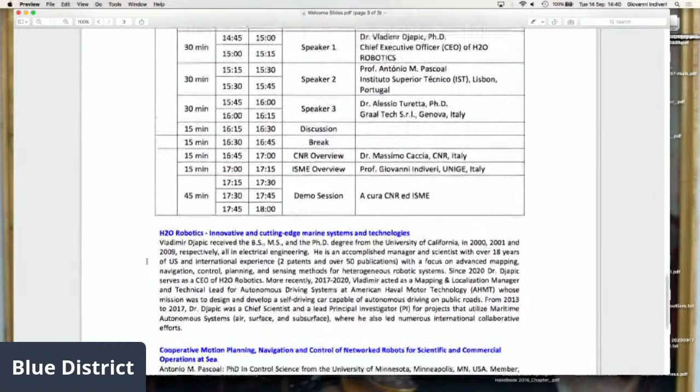So the first talk will be by Vladimir, approximately 30 minutes. This includes some questions at the end of the presentation. And here you see a short introduction of Vladimir himself. So he studied and worked for many years in the US in autonomous marine systems, and also more recently in autonomous driving cars. I will skip all the details that you can probably read on the slide.

I would just like to mention that a few years ago he came back to the old continent, and he is now leading this spin-off company - I think it's a spin-off of the University of Zagreb in Croatia. The title of his talk is Innovative and Cutting-Edge Marine Systems and Technologies.

Then, after his presentation, we will have a talk by Antonio Pascoal on cooperative motion planning, navigation, and control of networked robots for scientific and commercial operations at sea. Antonio's CV is also reported in the slide. He has a very long experience in several institutions, beginning with the IST that I mentioned earlier.

He also has an appointment with the National Institute of Oceanography in Goa, India, and he has been responsible for many years for the Technical Committee in Marine Systems of IFAC. He is a very active researcher, and I think many of you actually know him already. Let me thank both Vladimir and Antonio for having accepted this invitation, which was not obvious, given that they traveled in this time that is still a little bit critical, as you know.

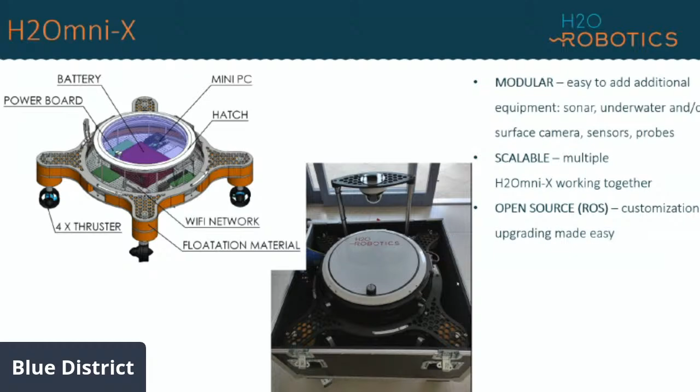Our system is modular, so we can add different equipment. Here showing the above-water camera; the below-water camera is not visible, but it's integrated. Different sonar systems, and also we showed multiple robots cooperating and working together. Nowadays very popular is this robotic operating system as the middleware for the software hosted on the platform.

Applications for this can be surveys of, in this case, coastal areas, ports, harbors, and you can do that with acoustic systems - sonar systems - to obtain bathymetry, information about the terrain below the surface vehicle. You can obtain 2D or 3D maps using sonar systems, or you can do the same thing with optical systems. From pictures that come from the video camera, you can do reconstruction using software tools to obtain the third dimension.

That's something you can do in post-processing. In some cases, using graphical processing units, you can do that in real time.

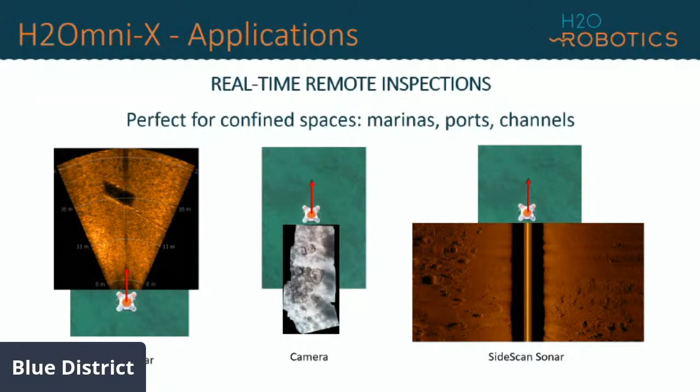So I'll break the presentation a little bit with the 2 robots working together in Biograd, which is a city in south Croatia, where we have this interdisciplinary training every October - it's going to happen this October, at the end of September, beginning of October. Anyone that is interested, Breaking the Surface is the name of it, so if anyone wants to come.

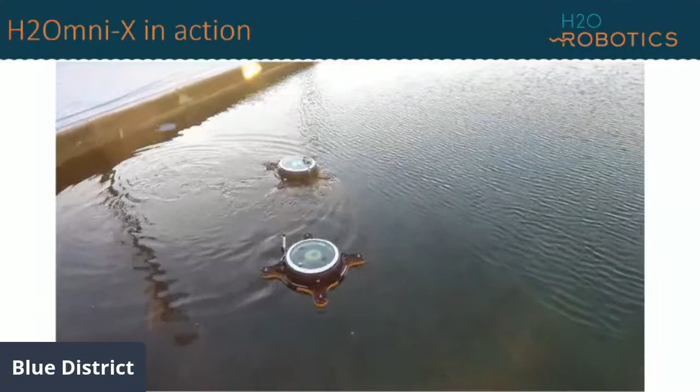Here you see the ability to follow a specific trajectory, as well as to do dynamic positioning by 2 robots. Right now, they're just pre-programmed to go to a specific location using their GPS and INS systems. The global positioning system you can utilize when you're on the surface.

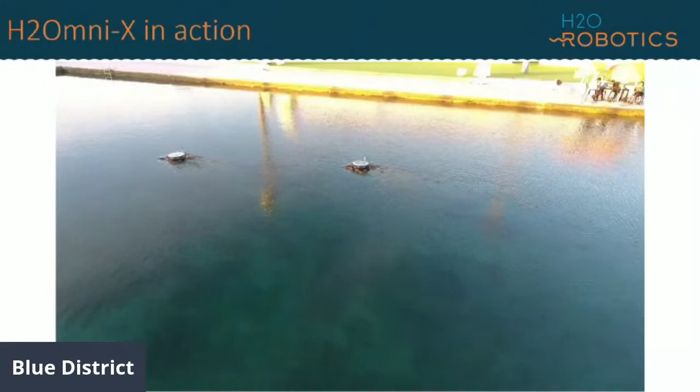I'm sure that Antonio will talk about some other ways to navigate underwater without GPS. But here we do use GPS, and the idea is to be able to precisely position in some areas that are close to the coast, that are confined, where you don't want to touch objects around you.

And then also do dynamic positioning in order to support diving operations or any other missions.

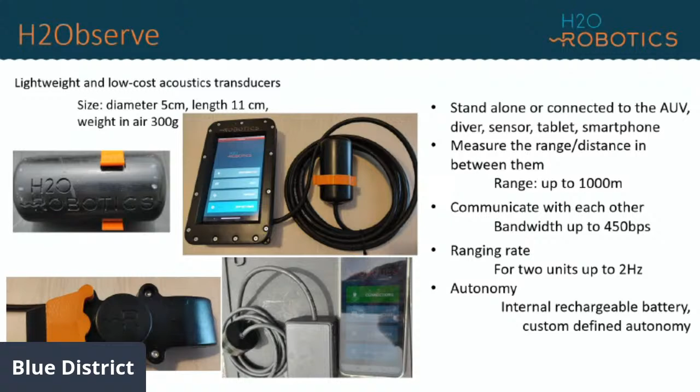So a diving operation can be performed where you just attach, with a carabiner commonly used for boating, this unit to the boat, and you talk to the diver using our app. So different applications for it.

What we are trying to target is smart city type applications. Nowadays a very popular term is Internet of Things, all the devices that are connected, even home appliances, smart homes where you can turn on your dishwasher or heater before you come home. But we want to do that with the underwater world. We want to connect different sensors, autonomous vehicles, and divers, and have connectivity at all times using our sensors and the terrestrial networks.

In addition to that application, in some situations it's very useful to have such devices deployed in the field and be able to pass information, because we noticed that deploying this device from the boat is easier than taking our surface vehicles to do measurements at sea. So we could be attractive partners for projects going on both in academia and industry.

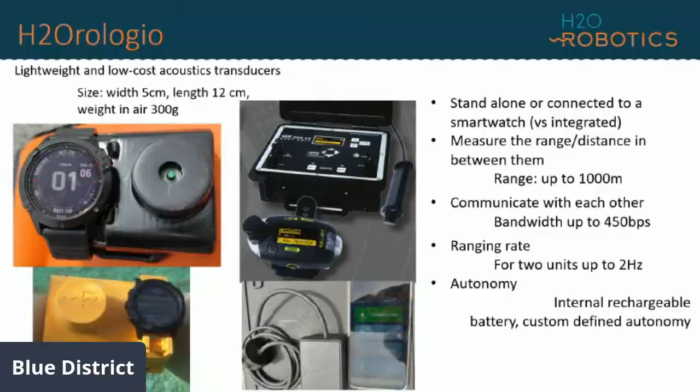This slide shows a bit about the potential utility of H2O Orologio as a product, and the diving buoy with electronics in it. You have an acoustic link between the diver and the buoy, and then GPS and GSM ability to communicate with the boat or the rest of the world.

Many of these technologies exist nowadays as part of Garmin's portfolio of products. Garmin has traditionally been known as a manufacturer of navigation units we used before cell phones, sometimes rented at rental car agencies. But with many products for outdoor activities, we think augmenting our technology with Garmin technology could be a way to go, so we're in the process of talking to them.

To show how you communicate with the boat, you have essentially two of our products working together. One, H2O Observe, connects with the cell phone or tablet, as I showed in that movie before. First you disconnect the unit, place it in the water, establish the Bluetooth connection, and then you can communicate with the diver.

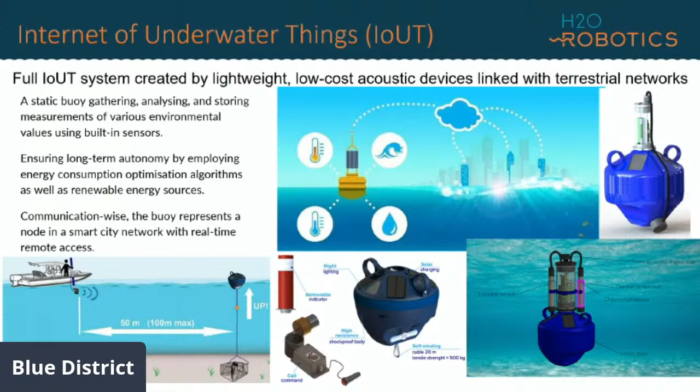to not only go up, but also have an active system that pulls the buoy down. So it will be a vertical profiler, and it can be utilized for environmental monitoring, which is the goal of this project. Thank you very much.

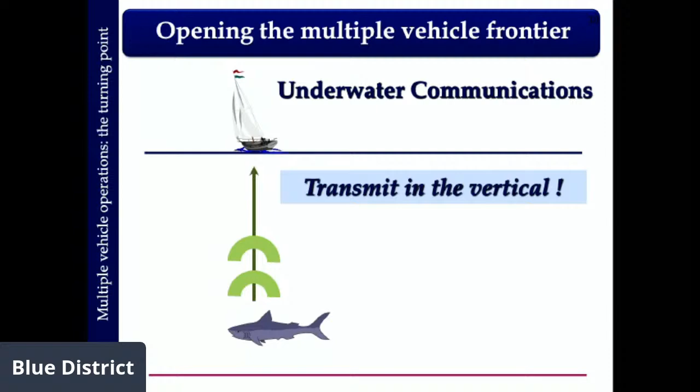Communications are extremely hard underwater because of multipath and many other things. So we came up with an idea back in 2000 - I think Pino was one of the reviewers of this proposal. Why not transmit in the vertical? You avoid the multipath and you bump up the baud rate. That's what we did under the European project called Asimov, 20 years ago.

This was the first time I was confronted with the need to operate a surface craft and an underwater vehicle in cooperation, so the top one would ride the bottom one - one as leader, the other as slave. This proved difficult because at the time we didn't have ROS, and ultra-short baseline systems to measure relative positions were still big and huge. Same with communications - the acoustic device we used was in a cylinder this size. It was a nightmare. So we did some work, but not to our entire satisfaction.

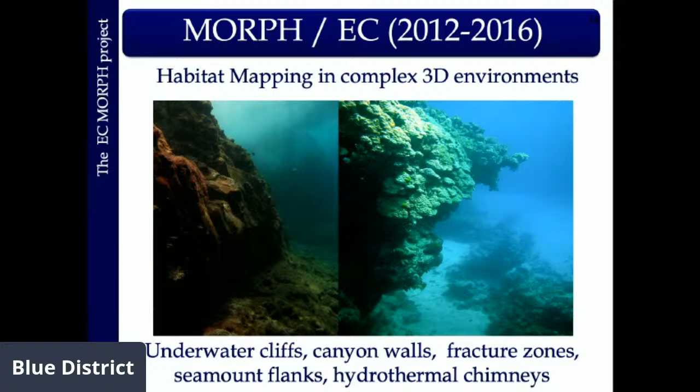I'll start with the first project where we really crystallized the concept of network systems: MORPH, which ended in 2016 - Cooperative Marine Robots for Marine Habitat Mapping. The idea is this: scientists told us that when we make maps of the seabed, okay fine, we can do that. But it's far harder to map vertical walls that extend over large depths, and you have to find out what fauna and flora are there. You can't use a classical boat because it's too close to shore.

So we collectively came up with the idea of developing a big virtual vehicle consisting of several vehicles put together: one at the surface doing navigation, knowing where it is; some vehicles in the water column playing the role of anchors, also trying to find their position and looking ahead with sonars; and then a bunch of slave vehicles connected virtually that map the seabed. There's a dance underwater as they progress and the wall is detected, they move.

And then there's even a negative slope on the wall - one of them has to coil back to maintain the transmission. It was a beautiful project where the vehicles had to communicate and establish a network for communications, controls, navigation, all kinds of things. There were many partners involved; the coordinator was Jörg Kalwa from Germany.

We did this successfully - Massimo was involved in this - and we ended up with the final mission in the Azores. This isn't the final mission, because I want to simplify things and not show anything extremely contrived. But let me see if I can go to the right clip - it's difficult.

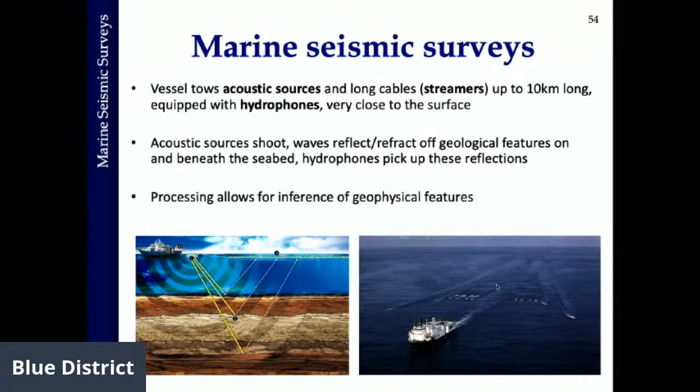If you give this data, here you see a big operation, extremely costly, with a classical boat or ship, and then the streamers down there. Some of these streamers in classical or commercial operations can be 10 kilometers long.

So now, what do you do with all of this data? That's the beautiful part. These are some images I got from a company in Portugal that cooperated with us. Once you pass the data to a good geophysicist, he or she will be able to interpret this very much as a doctor looks at the echo sound image. What I'm going to show, to me it's fascinating.

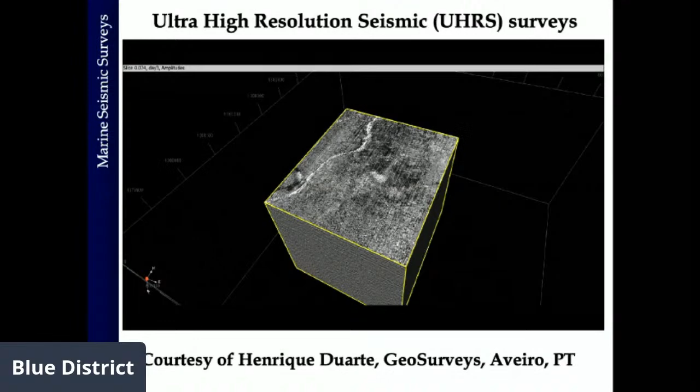After processing the data, you virtually cut these slices underneath the seabed and you see the geological structures there. They will be able to find out if there are resources there, or something even more interesting, and I'll give you another example. It's fantastic what people can do with this.

The problem is, to do this, commercial companies use big boats and the streamers can get entangled, and so on. We were very much interested in doing this, it's called geophysical survey, or in our case geotechnical surveying, over small areas to find out what is down there and underneath.

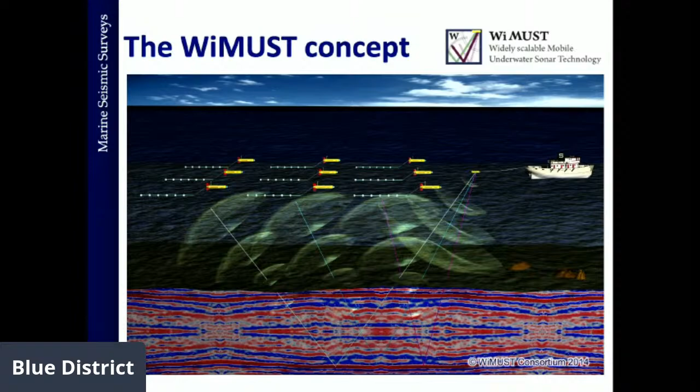So we came up with the idea collectively of replacing this ship by robots carrying the acoustic sources. The very important thing is that the streamers are not pulled or towed by the robots. They are independent, consisting of a number of robots pulling small streamers. So now you have an antenna, totally decoupled from the source, giving a lot of flexibility. You can even adapt the form of the antenna, and bring it down to increase the resolution.

First of all, you need to plan, so it's cooperative motion planning. Once you start the mission, you need cooperative navigation to find out where you are. Then once you know where you are, and given that you know where you wish to go, you have the cooperative motion control. All of these things have to be in place and working. Now, it's easier said than done.

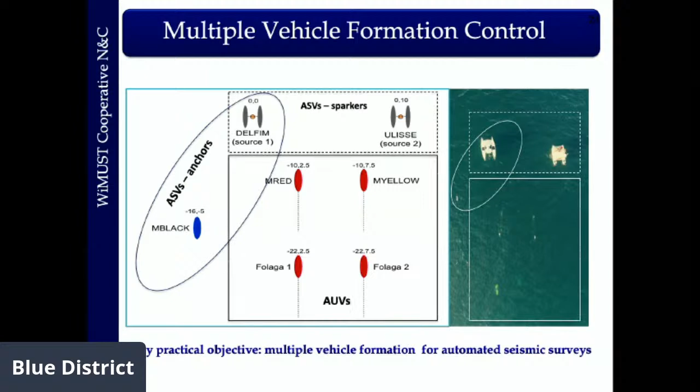This is what we did together with two vehicles at the surface, in fact three, and then four vehicles underwater. Two of them were Folagas, and the other ones were our Medusas. You can imagine the symphony that was going on, and one of the difficult things is to communicate and position yourselves underwater, but we managed to do this with a beautiful consortium that included Graaltech.

I'm going to skip this one, just to give you a glimpse of the final tests in the water.

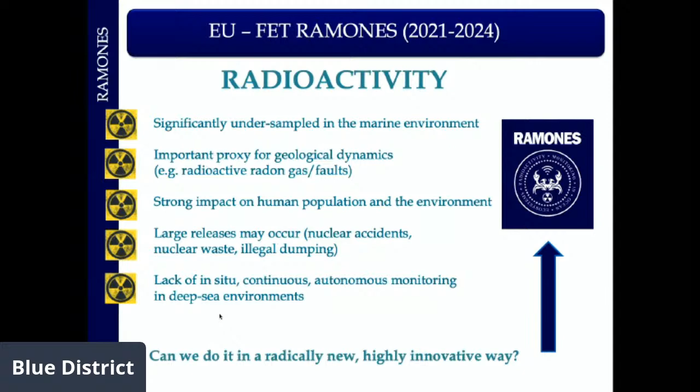The marine environment is significantly undersampled in terms of radioactivity. You need to find maps of what is going on, detecting sources, either man-made or nature-made. So the question was, can we do it in a radically new and highly innovative way? We came up with the Ramones concept, where we have a static lab, radiation instruments, and then we have 2 autonomous underwater gliders and 1 autonomous surface glider.

This is an artist's rendition. We have to engage these vehicles in talking to each other, sniffing with special sensors, and doing what we call adaptive sampling to find a map of radioactivity, which is not easy because some forms of radioactivity are carried and diverted by the currents.

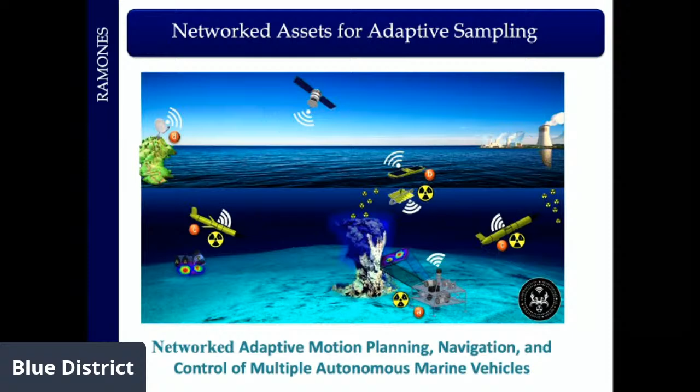So this started in January of this year. We have to do cooperative planning, navigation, and control with the wave glider, 2 underwater gliders, and the Benthic lab. The technological challenges, again a recurring theme: navigation, control, and now event-driven adaptive motion planning, because you need to do adaptive sampling, and then the assets have to communicate.

This is being coordinated by Theo Mertzimekis from the University of Athens in Greece, so I have very high hopes for this project, I'm very glad. So that's the Ramones project.

New soon, I hope. So let's give it a more recent twist, a technical interlude on things we have been doing since July of this year. Very quickly, 2 things. One is based on the PhD thesis of my student Nguyen Hung, who is very much interested in cooperative control of multi-agent systems.

Here is one of the problems he solved: when you have 1 or more targets and you want to lead them along certain routes, in order to find their positions you can have 1, 2, or more vehicles. He formulated the problem of, based on range measurements as Vlad was mentioning, finding where the target is, running an estimate of its position, and at the same time moving along with the target. That's what we call pursuit.

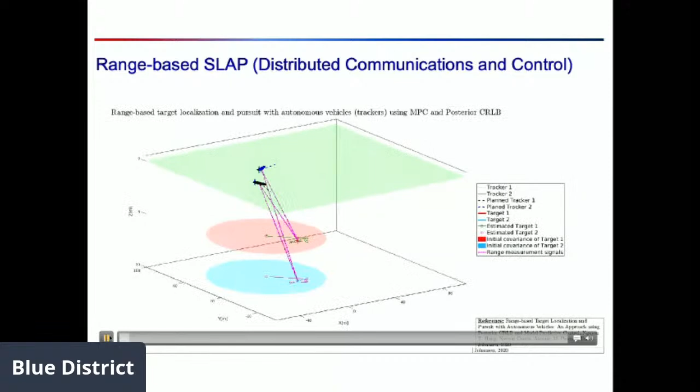Here you see the situation where you have 2 vehicles, the initial region of uncertainty at the top, and on the fly they decide over a moving horizon how to move to maximize a certain measure of information. In the long run, you see the estimate converging very quickly to the real position of the targets, and they move along with the targets. We are going to carry out further tests of this tomorrow.

So, experiment preparation: how do you convert this into practice? 3 Medusa vehicles, and now you have all the code running on board. I'm going to show you a little bit of how the tests went.

I'm about to finish, don't worry too much. Oh, no, you have time. Okay, so what you see here, it's quite interesting.

Of course, there are other solutions where you don't have to circle the target, and essentially you have to move along so that the angles between these guys and the target are 90 degrees. Automatically these trackers set the angles and maximize the information available for positioning. We did this at the surface using Wi-Fi and emulating range measurements. Tomorrow, we'll make one of them dive and act as a target and use acoustics to do all of this. This will open the way for a number of missions that I consider extremely interesting.

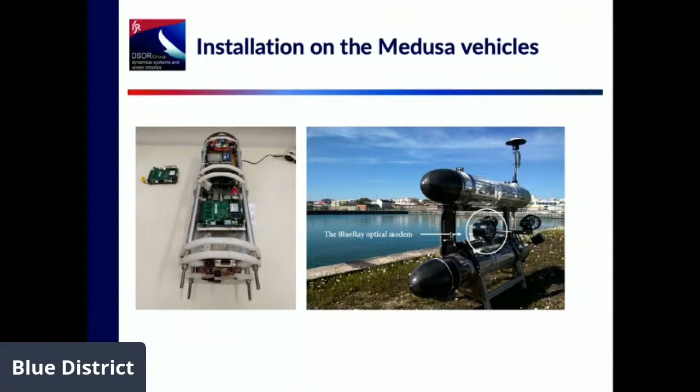So this is the very last thing I wish to show you. Here we have the boards coming from CMRE, and here you have the BlueRay optical modem installed on board one of the Medusas, and I'm going to show you a little example. It's hard to see, so let me stop a little bit.

I find this fascinating. So, a problem for those of you that want to think about this: suppose you want to be more sophisticated and not wait for the vehicles to correctly align themselves—how can you point the modems? That's where I see a beautiful connection between this and event-driven communications. Because in event-driven communications, each vehicle runs an estimate of where it thinks the other vehicles are, so it can do a preview and point the beam there, and the other one does the same. I'll just leave this flying in the air, which I believe to be very interesting.

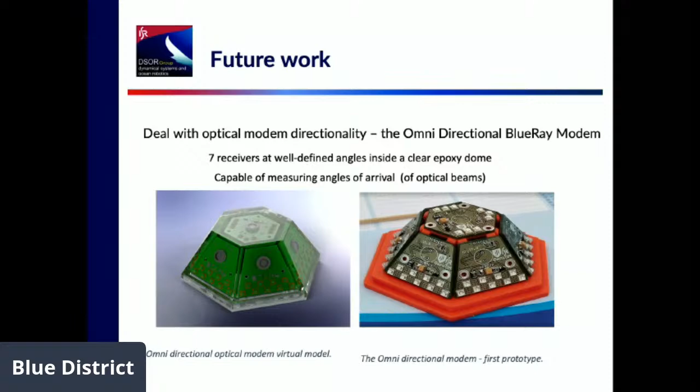And now, in order to somehow combat this problem, we are developing what we call an omnidirectional BlueRay modem with seven receivers, probably being able to receive from different directions and also measuring the angles of arrival. So it's just a teaser to complete my presentation.

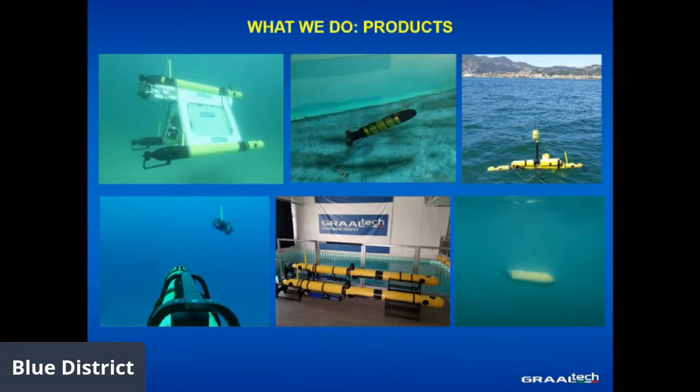What we do, some products: this is one example, a hybrid AUV. We do modules for the AUVs. We have surface vehicles supporting the AUV in operation, acting as a gateway buoy. We have some reconfigurable AUV or ROV robots - these are just a few pictures. And we also have some manipulators, electrically driven manipulators that we design and develop for the customer.

But in particular, for the purpose of this talk, the thing we do that is interesting is R&D services, because almost 90% of the time of our people is spent in R&D projects, either funded by public funding or more often by private industry. So we have 3 ways of realizing innovation.

Either realizing a prototype when the customer arrives with a list of specifications in mind, or we do a public funded research project, which is the third point, or the second one, what we call beyond prototyping, which happens whenever the customer comes with an idea that is not yet translated into specifications. So we sit together with the customer, make a plan, do engineering, do testing, and continue iterating this way until we reach the goal.

Now, this is what we did for the projects that I'm going to discuss with you today.

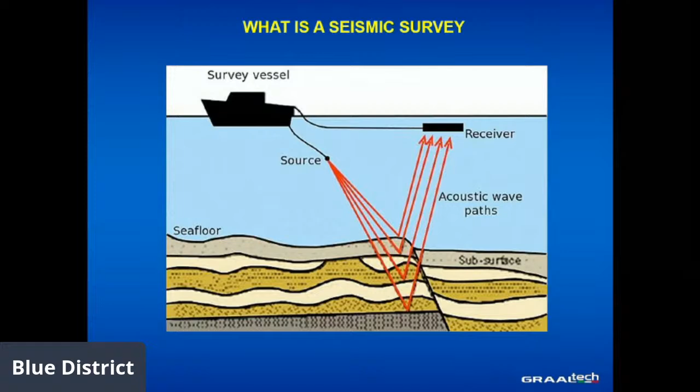The receivers can be, as Antonio showed, attached along streamers that are normally towed by a vessel, and a vessel towing the streamers is considered the largest man-made moving object on Earth, because the length of the streamers can reach more than 10 kilometers, and the wideness is around 1 kilometer.

So it's a huge undertaking with a lot of obvious complications in operations related to maneuvering and getting permission for moving, because when they do a survey, they need to go in advance in the area to ask for permission, to pay fishermen not to go out at sea for the period of the survey, and so on. There is an alternative strategy which is based on bottom nodes.

Bottom nodes are sensors that are deployed on the bottom and record. The problem with this is that the deployment, if done with an ROV, involves putting them in a kind of structure that is deployed on the bottom, then the ROV goes one by one and deploys each in the given position, so it's costly.

Deployment and recovery: the alternative way more recently explored, there is a rope, called nodes on a rope. The bottom nodes are linked by a rope that is used for deploying and recovering. Operations are faster in this case because it's easier, but the problem is that it's hard to guarantee the proper positioning of each node, especially in deep water applications.

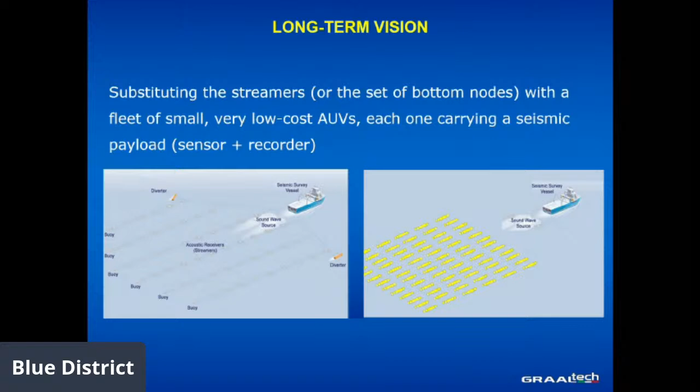Now, the first project we worked on - it's ten years ago, I realize now - was called SpiceRec, phase 1. Just to give you an idea of how things happen sometimes in our kind of R&D projects, the customer came to us with this video. I hope I can show it here, yes.

And they said, we have in mind this. We are envisioning this kind of scenario where a set of AUVs are in the order of thousands, because thousands is the order of magnitude of vehicles along the streamers, since they are spaced some tens of meters apart but span 10 kilometers, so there are a lot of vehicles.

We want them to be deployed somehow in a very fast way. They need to be able to navigate to their target point, reach the assigned point, land with a certain accuracy, and stay there for a while.

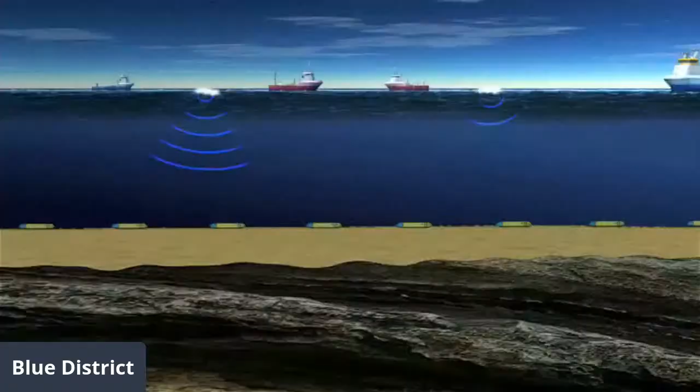Once all of them are deployed, the real survey begins - first the assessment of position, because it's important for what Antonio was mentioning before, the reconstruction afterward in post-processing. They need to know where each node was when it recorded data. Then there is the shooting vessel injecting energy, and the energy is recorded.

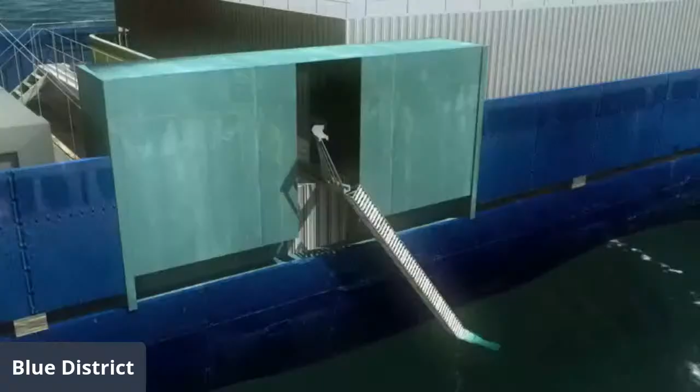After a while of recording, every vehicle receives a signal - at that time it was HiPAP, a commercial product, but at the time was considered a good one. Every vehicle receives a wake-up signal, comes back to the ship, and then - kind of fiction - data is downloaded immediately and battery recharged immediately, but this was just to show the concept.

But this was what we were asked by our customer - they said, I want to do this. As you can imagine, it's not easy to approach this kind of big vision, so we started together with them to approach the problem with a sort of proof of concept.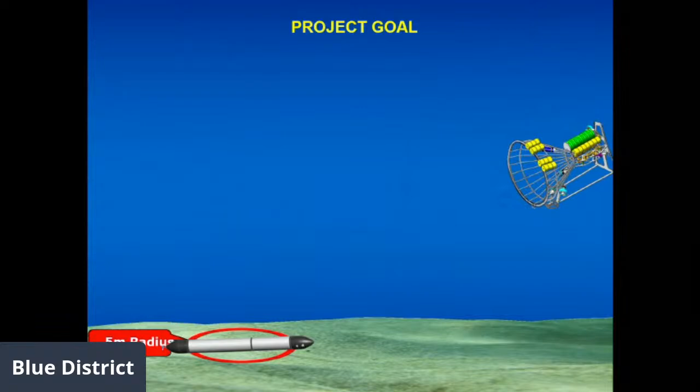The first thing we did was consider an available vehicle from our stock, at that time called Folaga, now retired, let's say. The idea was to show the capability of an AUV to land accurately in a spot, and then, once receiving the acoustic signal, to wake up and reach a recovery basket. This was the basic idea.

So we did some modifications to our vehicle, ran some tests, and then made a final experiment with landing, where the AUV was localized - it was mounting the HiPAP device at that time - and was receiving correction to be steered and to land. CGG Veritas was our customer at that time, and the vehicle was capable of landing close to the border of this circle, a 1.5 meter range, so well within the 5 meter range specification.

Similar results were achieved for entering the basket. That was done by equipping the recovery basket with hydrophones that were pinging - three hydrophones pinging at different times - and based on the difference in time of arrival, the AUV was capable of understanding its own position and correcting by lateral and vertical translation, thanks to the mobility of the vehicle, in order to position itself at the center of the basket.

The AUV, while I'm talking, is moving. You have seen at the beginning emerging here, and now you will see shortly reaching the basket below. It's not so exciting a video, but just to show you that at the end it enters into the basket. It's going slow because it's constantly correcting its own position based on the received acoustic signal from the transponder.

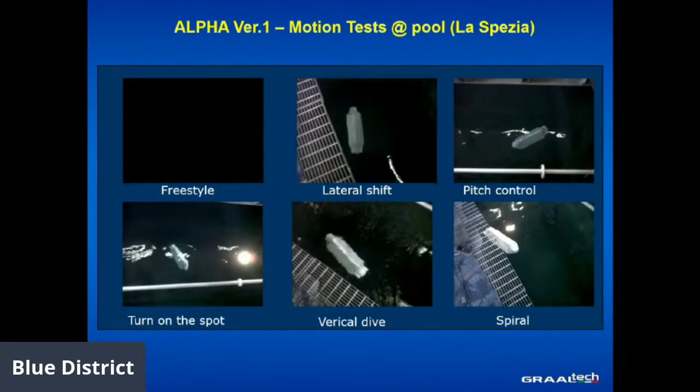So we started with tests. These are very basic motions, not so interesting to see, with the vehicle in a pool at the beginning. Then we went to a lake to start better tests. In parallel, we started testing coupling by going into a river where there was some current.

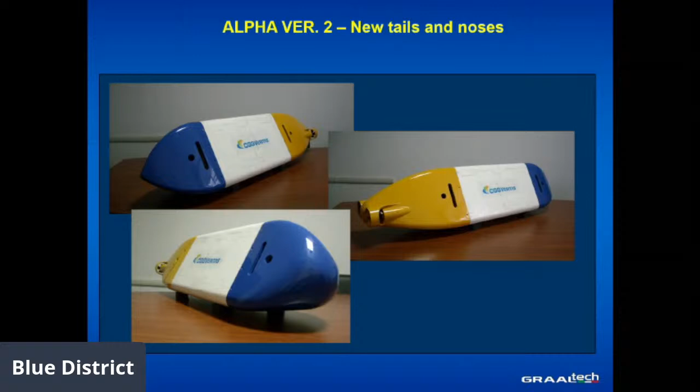Then we sat with the customer and analyzed the different lessons learned. We had to reshape it to improve the hydrodynamic capability for better target reaching, and we started with new tails and new noses, testing different shapes. We made a lot of other tests at sea for navigation, improving the performance which is fundamental for guaranteeing good target reaching.

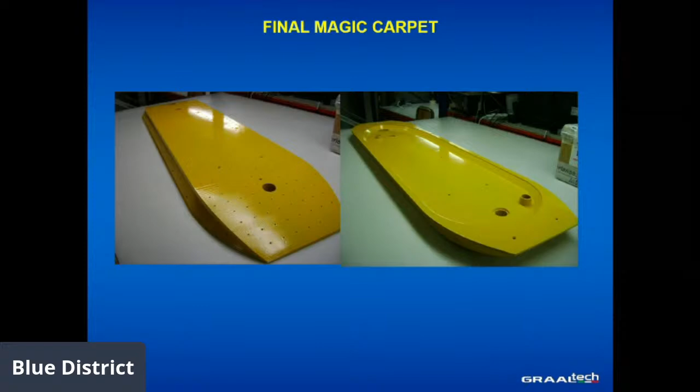For sea bottom holding, we introduced a concept - actually the idea came from our customer - the magic carpet, as he called it. The idea is having a surface with little holes, like the cup of a shower, where water can be injected, and this generates a flow that allows us to fluidify the sand, making the soil less stiff so the vehicle can penetrate a little. I will show you a video later.

Then, of course, there was also the need for inventing a sensor to understand that the burial was successful, but I will show you that later. And then the other point was the positioning of the sensor, how to couple this to the bottom of the vehicle.

We realized two different releases of the vehicle that were used for doing seismic tests. We spent other time - I want to make the story short - and we finalized with these two vehicles, Alpha version 1 and version 2, and we collected very good results with negative buoyancy, which at that time was not so common, navigating with -2 kilograms of buoyancy at 2.5 knots.

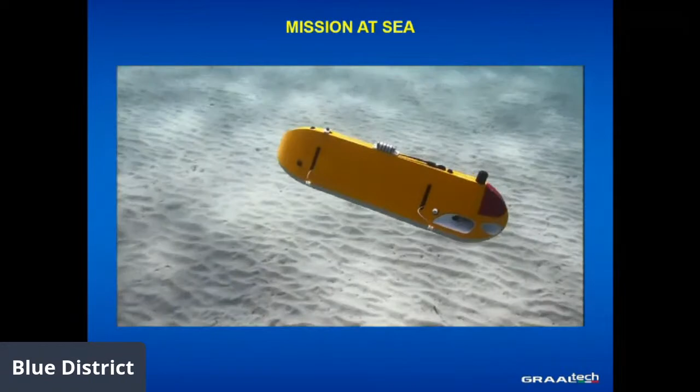You will see now that once it stopped the motor, it just goes down by gravity, lifting a little sand, and then it starts using the magic carpet. I don't know a good wording in English, but the idea is making the surface level easier to be penetrated.

There was an alternation of this activation of the magic carpet with the vertical thruster pushing down. So it was doing this for a few seconds, then pushing, then again, and then pushing. And after a while, the white thing you see is the burial sensor that we developed.

It's a sensor that understands when it is covered by sand. So after a while, it is able to be a few millimeters inside the sand, but those few millimeters were considered enough to guarantee a better coupling and, let's say, facing the current a little. Of course, not a strong bottom current, but it was enough.

Then, once the acoustic signal was received, you see the acoustic transducer on top was received, the vehicle was able to take off and go back to the surface. This was a vertical takeoff.

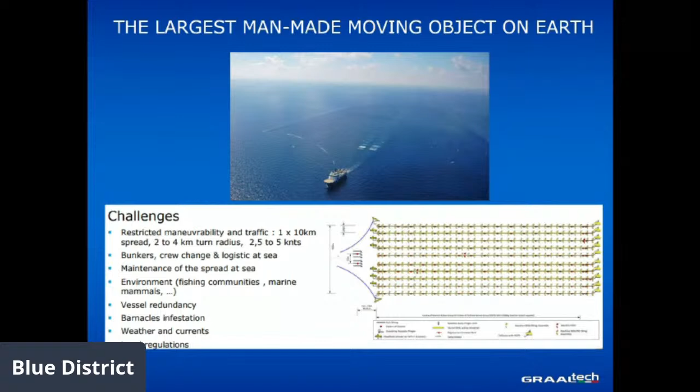The second important project was Musafir, phase 1. Here, while the first one was for bottom nodes, this one was for streamers, for finding a solution to streamers, based, as we said, on a fleet of small AUVs.

So at that time, phase 1 was launched, and the idea was showing that the operational model based on robots was achievable. The idea was just having a reduced scale demonstrator in water, with 16 AUVs in water for some days, recording and checking the quality of data acquired.

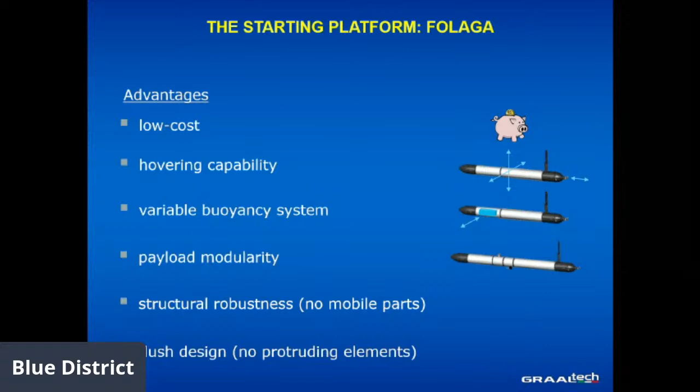So we started again with our available vehicle for a number of reasonable motivations, low cost, etc. The target operative scenario was a C2 vessel with 16 AUVs in the water, 6 spare on the deck, in order to substitute in case of failure and not stop operation. And we did it for 30 days.

There was not a real cooperation, as in the case of WiMUST. It was even less, because the control was centralized. There was a C2 vessel with a USBL antenna localizing all the vehicles, then computing on board the C2 vessel the correction for each of them, and sending the correction through a modem.

From the control point of view, I know Antonio Pino and others are saying this is a very easy job. It's true, I confess, but there were a lot of other things. It was working, it was enough, and the goal was just showing what I said. But there were a lot of things to do.

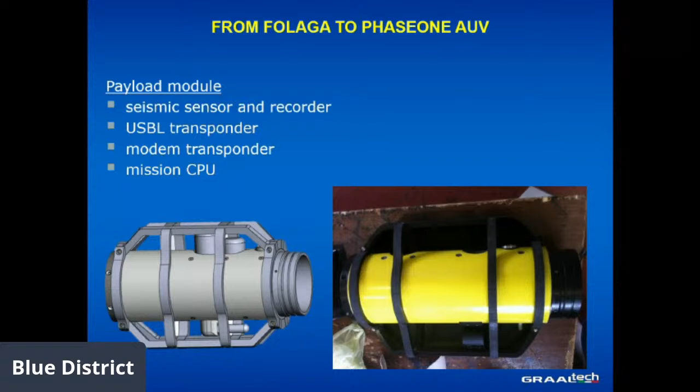First of all, making 20 vehicles in 8 months, because it was not easy for us at that time. We had to prepare the seismic payload - in this case there was not the problem of coupling because the vehicle was in the water, but still it had to be able to record and acoustically be guided by the C2 vessel.

More software development, because despite the control point of view being easy, from the C2 point of view and the control and all the operation, there was some strong activity to be performed, also in terms of a graphical user interface for understanding what's going on underwater. Because in a mission taking 10 hours per day, you need to know what is going on underwater, where the vehicles are.

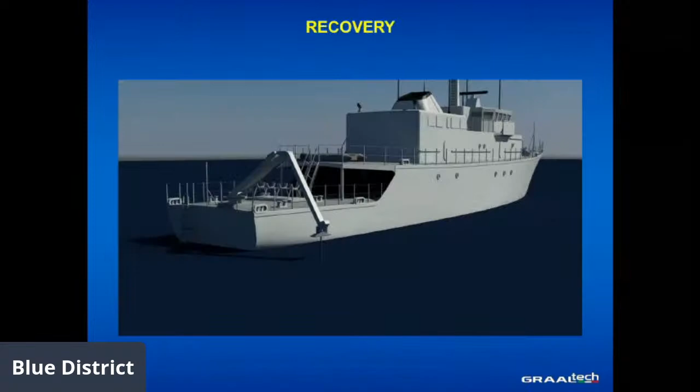A lot of tests at sea with launch that is easy, very intuitive, but unfortunately I don't have the video. Recovery is more complicated because towing is not easy. So we had to invent a way, with a winch hooked to the nose of the vehicle by an operator close by, that allowed recovering a batch of vehicles with these ropes.

I don't have, unfortunately, all these videos.

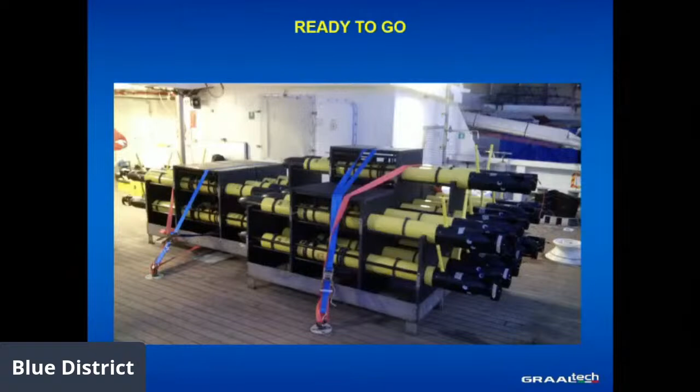Then, once we did the vehicle, we mobilized, and we finally were able to go there. And this is what happened every day.

Deployment at dawn, then swarm supervision for 10 hours. At the beginning it was exciting, because when we saw things working, we were happy. But after a while it was boring, because you were looking at the screen all day and it was not so enjoyable. Then recovery, that took a lot of time every day, between 45 minutes and 1 hour and a half, depending on the sea state. So it was a huge energy drain again.

Then washing the vehicle, charging the batteries, and downloading the seismic data every day. This was continuously done for 30 days, so it was also an intense experience in terms of testing.

Then, I will not talk about WeMust, I just put here a reference to some videos that are available on YouTube for those that are interested. You can check and see some videos. And I removed the slides while I was sitting there.

Then Space Rec Phase 1 continued after, because in 2014 it was stopped with Echo, the one in Sardinia, due to a management change in our customer. As I told you, the vehicles were to be produced in 20 units to show the capability of landing.

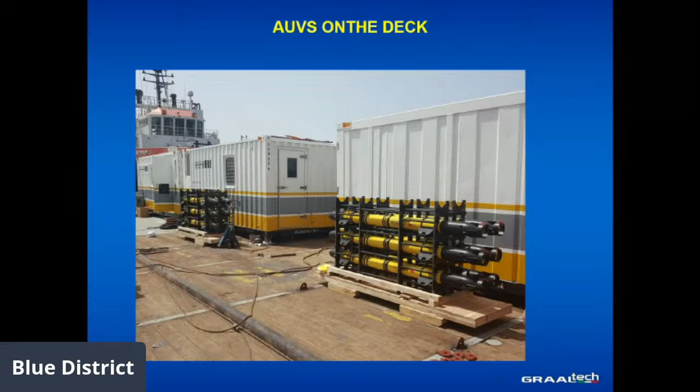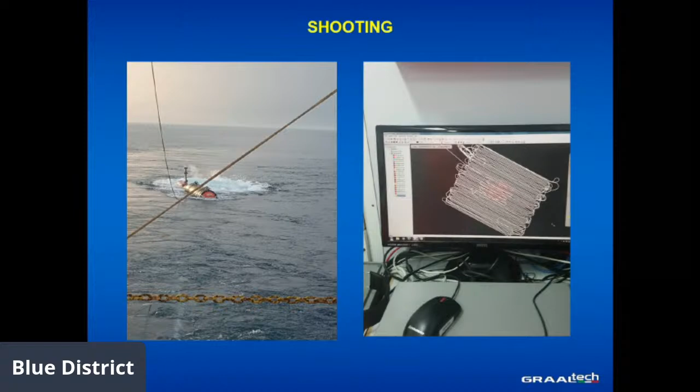After this, we were engaged for Phase 2. Our customer approved it, and Phase 2 of the project could start in 2017.

As you remember, we stopped with the Echo vehicle, so we moved on with Foxtrot, following the NATO alphabet naming convention. We ended up with this Foxtrot vehicle that was supposed to be manufactured in hundreds of units. So what we did was completely modify, starting from scratch, the software architecture, because managing 200 vehicles is a different story than 16 or 20.

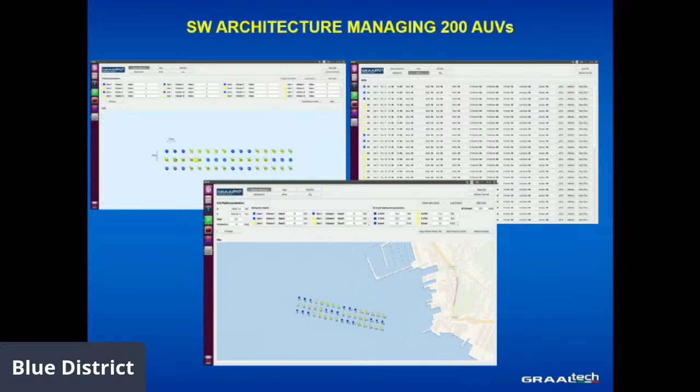We started building the vehicles and spending a lot of time testing them at sea. That is complicated when you have a big number, also for logistic reasons. We had to work with a new recovery device because it was not acceptable to have an operator hooking the vehicle on the surface, etc.

I had to remove some pictures because of confidentiality, and I cannot show you video, but I can try to show you, hopefully without any infringement. I hope it's okay.

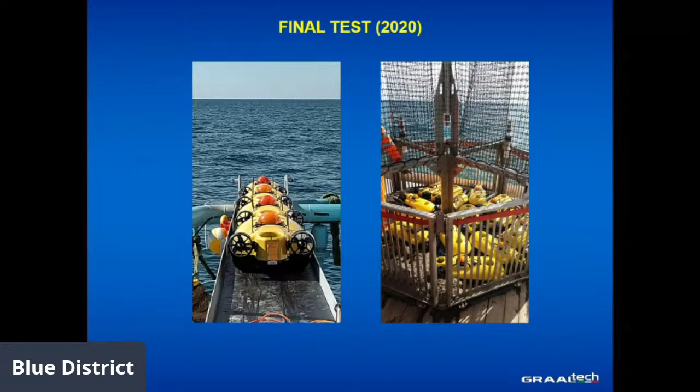These are pictures taken by our mobile phone, so I hope there's no problem. This is the test vessel we used for this final test, where the launch was done with a ramp, as in the other story.

Some of them were intentionally put close enough for this picture. Of course, for a real seismic survey, they need to be 50 or 100 meters apart from each other. These were put close together intentionally for the picture.

This is the recovery basket used for recovering them, where you see the number is around 20, the number of vehicles that can be hosted, because it cannot be more. When they are out of the water, you cannot guarantee they are well positioned inside, so you can have more than one on top of the other, which is risky for the vehicles themselves.

And that's it for this project. I cannot show you the videos.

I want to conclude with an ongoing project, Musafir, the one in water column phase 2. Musafir was okay in terms of showing the good capability of the vehicle, so it was promoted to phase 2, where the idea is moving from 16 to 100 vehicles in perspective. In this case, we had to change significantly the way of controlling, and of course it cannot be done in a centralized way.

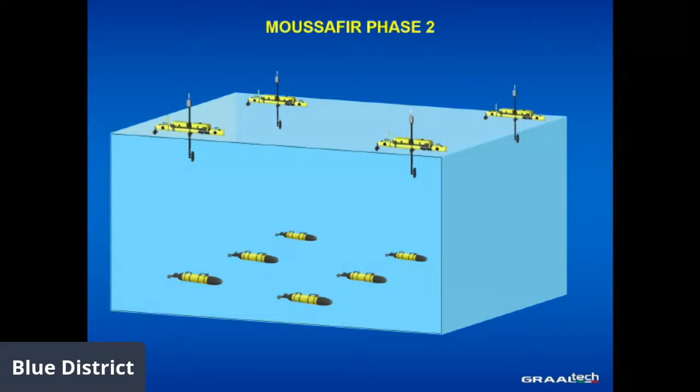I think I'm running long, so I'll stop here.

No, it's perfect, 30 minutes right now. But okay, I have to leave time for questions. Sorry, that's it. So thank you, Alessio. Really, thank you very much. This was extremely interesting, at least for me. I have more than one question, but I'd like to give the floor first. Yes, please. Sure.

Okay, the control strategy was with the USBL in this case as well. Every vehicle was localized. They were deployed in batches and localized with the USBL, which was mandatory in any case. The problem is that USBL transponders mounted on the AUV are costly, probably one of the most expensive parts of the vehicle. But so far they cannot abandon this because they need to localize the vehicles once they are on the sea bottom, since there's a range of accuracy around the target that is acceptable, but even inside that range, they need to know exactly where it is in order to use this information in post-processing for analyzing the data. So once this device is on board, it's worth using it also for navigation and localization.

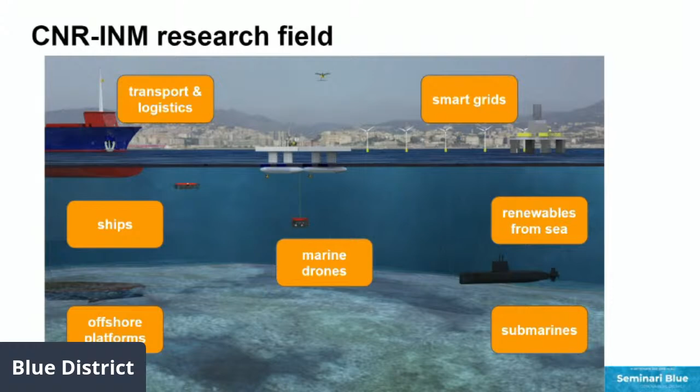And which is the vision of the Institute? We know that there is a key keyword, which is sustainability. So we need to develop technology that allows us to develop all these systems while being sustainable from an environmental, social, and economic point of view. So when we face the development of the technology, we need to keep in mind these three pillars.

A possible technological solution to go in this direction is to work on autonomous systems. But for doing that, we have to face many research and innovation challenges in different disciplines, on one side more in ICT, robotics, machine learning, and in some way energy management, because it is related to grids of energy and so on, and on the other, more traditional aspects related to the world of naval architecture and marine systems, such as hydrodynamics, hydroacoustics, and hydroelasticity. As I mentioned before, the guidelines of our research are autonomous systems and bio-inspired systems.

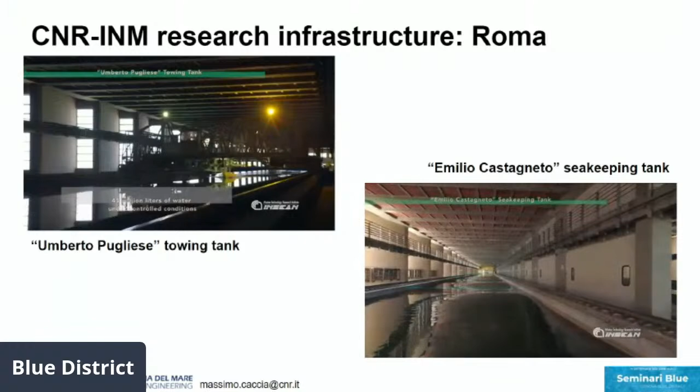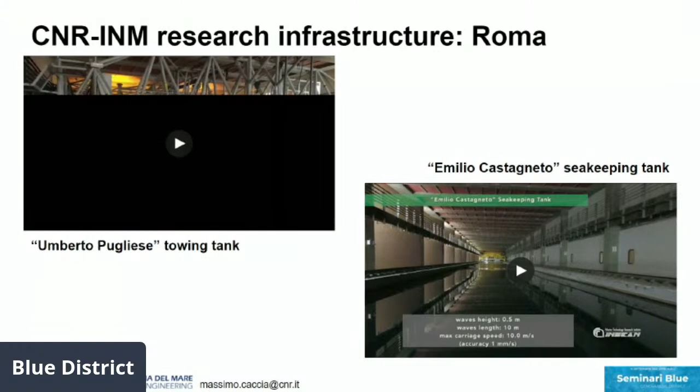Now, going to see something about the infrastructures available inside our institute. In Rome, we have basically all the infrastructures of the Italian towing tank, with the Umberto Pugliese towing tank and the Emilio Castagneto seakeeping tank. This building is 450 meters long, and in the seakeeping tank it is possible to generate waves up to half a meter in height and 10 meters in length. The speed of the carriage is about 10 meters per second, and we have something similar also in the conventional towing tank.

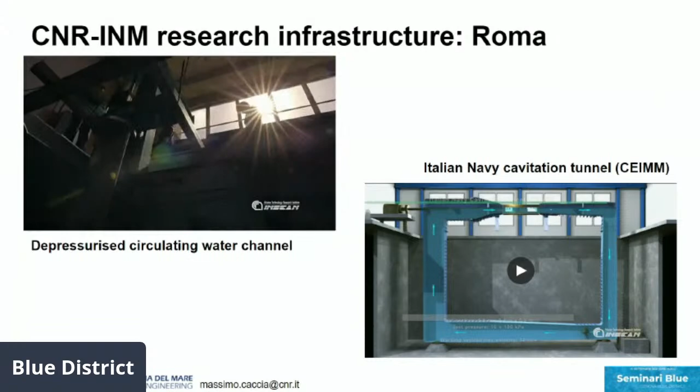We also have other infrastructures, such as the depressurized circulating water channel. What you see on the top left is basically a building of 4 floors, where you have the possibility of circulating water with the water open on top, and you can test different models, also small-scale models of infrastructure for energy production at sea and so on.

And also, as you see in the bottom right, in the movie we saw before, but maybe going back and forward we can see it again, we have the cavitation tunnel of the Italian Navy. This is more traditional, but in any case, not so small.

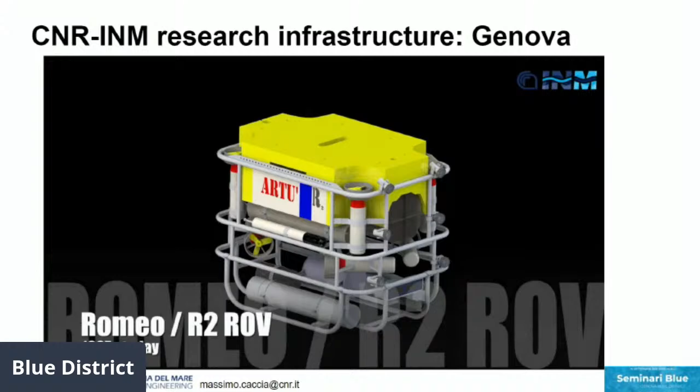Then in Genova we have a different research infrastructure, basically made by a fleet of unmanned marine vehicles, and we have a long story, as I said before. In the second half of the 90s we developed the Romeo ROV, which we used in different campaigns. For instance, in '97 in Antarctica, and in 2000 in the European project Aramis to study the thermal vents in Melos Island.

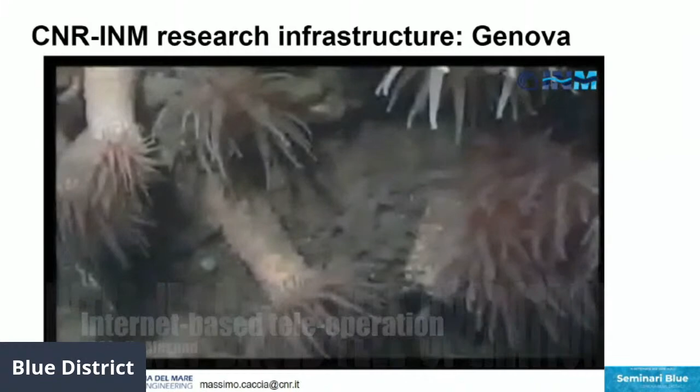Then in 2002 we used it for internet-based teleoperation, both in Antarctica and in the Arctic. And then in 2003-05 we had this concept of the Antarctic benthic shuttle, where the vehicle released a benthic chamber on the seabed and then recovered it using acoustic beacons one day after.

And in 2003 and 2004, we were the first to use an unmanned surface vehicle in Antarctica to collect the surface microlayer of the sea in order to study it. At that time, there were some pioneering studies about the exchanges at the interface between water and atmosphere, aiming to understand what was going on with global climate change.

We also developed vehicles for monitoring of ships. In this case, this is a robot climbing with magnetic tracks, and then a small semi-submersible vehicle to recover emergency towing systems in a cooperative way. We made this project about 10 years ago, exploiting some of the concepts about robot cooperation that Antonio mentioned before.

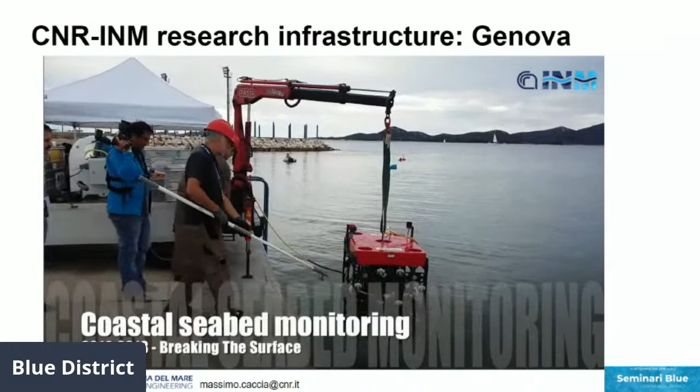And then we used that prototype vehicle for monitoring the ice-water interface in the Arctic, and it was the first time that someone collected a sample of water just below the wall of tidal glaciers that are 50, 80 meters, so it is not possible to go by man because it's too dangerous.

We also developed, in the meantime, e-URoPe ROV AUV, but there was a kind of version, a smaller version of Romeo, and we used it also for gas emission monitoring at Scoglio d'Africa with the Italian Navy a couple of years ago, just before COVID.

Then with the Proteus ROV AUV USSV, we have, as you see in this short graphics movie, the possibility of changing the structure of the... no, okay. Ooh, no, I can manage it.

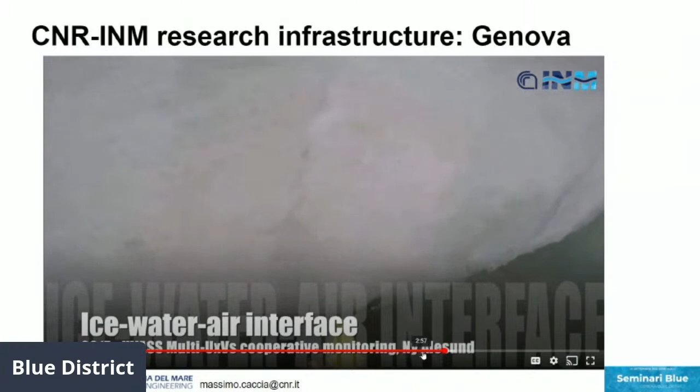Yeah, because this is a reconfigurable vehicle. You have an ROV, but if you mount batteries on the bottom and the acoustic beacon on the top, you have an AUV. And then if you add buoyancy on the top and the GPS and Wi-Fi, you have a semi-submersible vehicle.

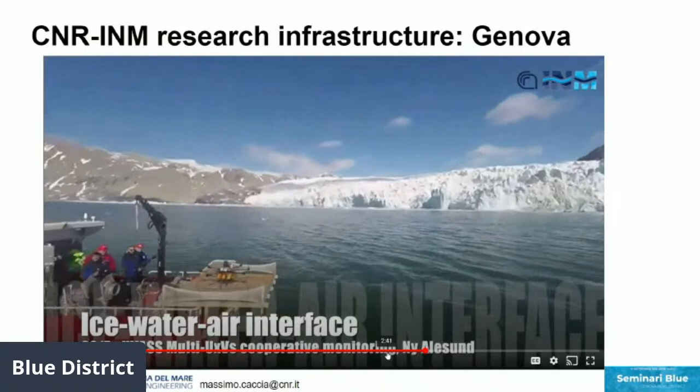And in 2017, we used it combined with aerial drones to study all the column from the surface to the air column in the proximity of tidal glaciers in Svalbard Island, close to the Dirigibile Italia station managed by CNR.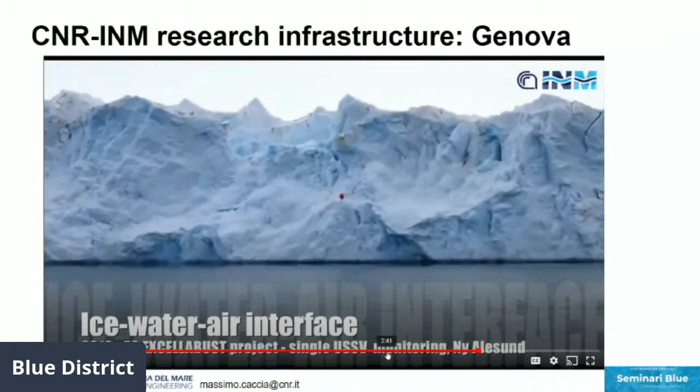In that case, we tried to see what happens if we use more vehicles, different vehicles, but for a small surface vessel, it is not a good solution.

So one year later, we went there with only one vehicle equipped with 2 winches for deploying and recovering underwater and air sensors. In 2018, we developed also an underwater arm and mounted it on Proteus to collect bryozoa in Antarctica, and all these bryozoa were then planted again in some cages, and they survived.

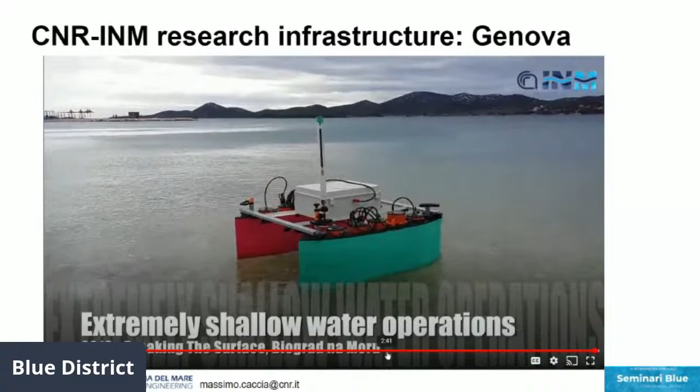Here we have some experiments on learning by imitation and other shallow water operations with SWAMP. That is the last vehicle that we developed, and it is designed for ultra shallow water operations with pump jet propulsion, all made by foam and other innovative mechanical and naval solutions.

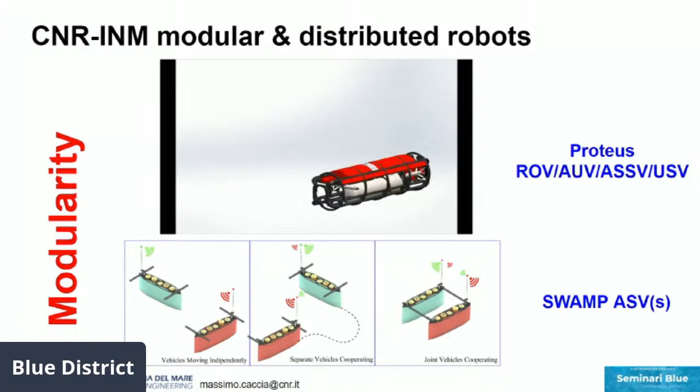As I showed before, we have the concept of ROV, AUV, ASSV, and USV system based on the Proteus block, because when you have 2 semi-submersible vehicles, you can join them with a frame and you obtain a catamaran. The concept of the Swamp ASV is to have 2 separate hulls that can be connected by rigid, soft, or pure communication links.

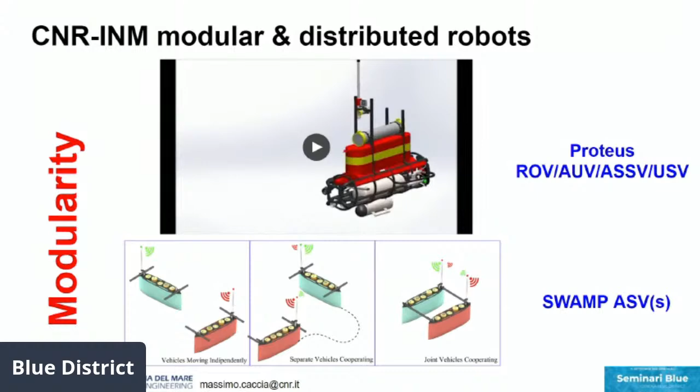And all these vehicles are used in a number of European projects with different applications, maybe in harbor, marinas, coastal areas, and laguna. And we have also a clear capitalization plan of these vehicles during the project.

So we have an Interreg Maritime Italy-France project, Matrac, where we use the Proteus vehicle, AUV, with a small buoy equipped with a winch to be kept in shallow water, as in harbor, so maximum 12-14 meters on the vertical of the vehicle, so we can avoid using expensive acoustic systems for localizing and communicating with the vehicle, but only simple GPS and Wi-Fi connected to the surface buoy.

This vehicle and Swamp ASV are used in the Blue Roses project, and the results are being exploited in the Interreg Italy-Croatia project, where we are going to build 2 new prototypes of Swamp that will be used also in an H2020 project, Milestone.

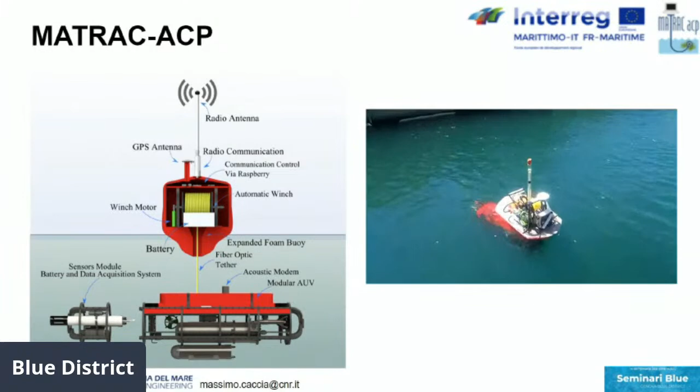Then, in Blue Roses, we have a different partnership.

Antonio is a research group in IST, is a partner. We have also OptionsNet, Omniver, and Navigo as partners.

We have different objectives. From the point of view of technologies, the objective is to develop a prototype middleware architecture and tools, basically for marine IoT, and different innovative services such as guaranteeing remote access to naturalistic and cultural underwater sites, remote seawaters and seabed monitoring inside marinas via a mobile app, and then studies for monitoring yacht hulls for security and support to refit and dismantling.

We are trying to understand how we can develop new services and tools for integrating robots in innovative leisure boats, especially very expensive yachts. And then we have, of course, common dissemination and communication objectives to increase public awareness.

And we see here a basic sketch of Blue Rose's concept and architecture, and the 2 pilots. We have one for tourism in Algarve and one for water and seabed monitoring in a marina in Viareggio.

In Innovamare, it is an Interreg Italy-Croatia project where it is foreseen to develop a cross-border DIH on marine technology with a node in Venice at the headquarters of the Institute of Marine Science of CNR. We are going to develop 2 swamp ASVs with their kits and sensors. And from the robotic point of view, an interesting aspect is to develop a kind of surface effect ship.

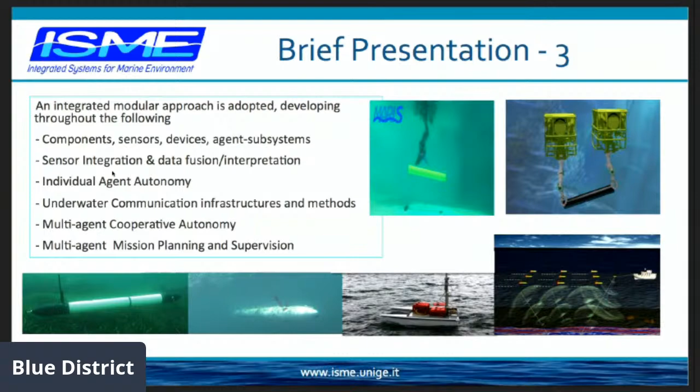Just one word, but I think an important one, about the role of Genova University in this. As I mentioned earlier, the headquarters of ISME are hosted in Genova. And I must confirm that the university, in the last few years in particular, has had a very strong commitment to push for all the topics related to the ocean.

So a few years ago, this Centro del Mare was established—an initiative to coordinate all the university activities dealing with the ocean, not only in engineering, but also in all the other topics: economy, law school, history. This Centro del Mare also hosts a very ambitious PhD program coordinating all these topics. I find this very important, and useful for the audience to be aware of.

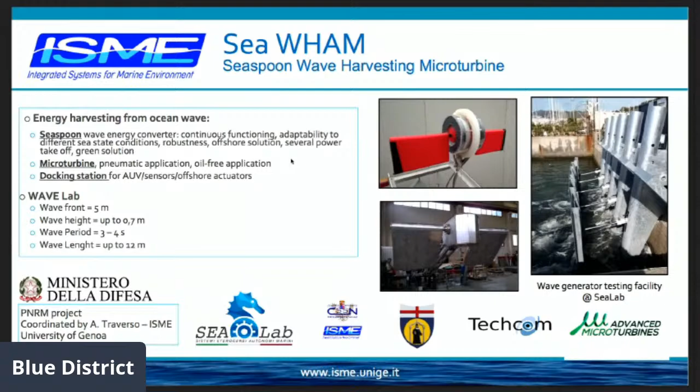Energy harvesting and energy management, energy-related issues with the ocean, are one of the topics covered by the Institute and by the center. In fact, the center also hosts a rather large infrastructure - a wave generator used for energy harvesting experiments and studies. The responsible person in this case is from the University of Genova, Alberto Traverso, who is responsible for this.

WiMUST was mentioned already many times today, and I don't want to bother people any further. I just want to mention that the web page of this project is still up and running, and there is also a YouTube channel from ISME where you can find specific videos related to WiMUST. If anybody has any other question or interest, myself, Antonio, Alessio - we were all on this project and can of course provide more feedback.

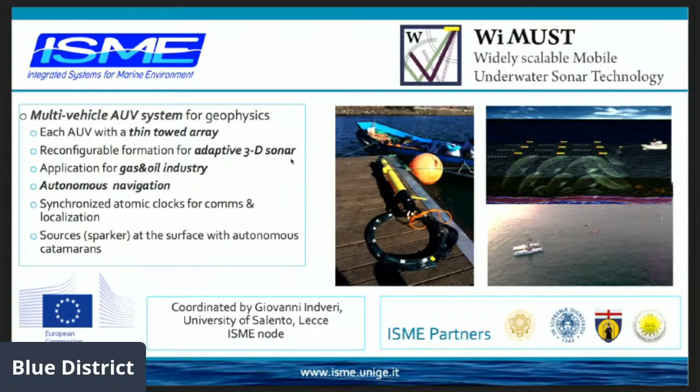I put these pictures here just to convey the message that these kinds of activities, as was mentioned I think by Antonio already, are very demanding in terms of manpower. These large projects where you put a lot of vehicles at sea - even Alessio mentioned the same for their own company experience - require a lot of work in terms of integration. This is even more so if the assets you put together come from different partners. So the effort of integration is very large, and you can see this over the WiMUST project, but you could probably say the same with many other marine robotics projects.

There are these pictures over the years where the number of people is rather impressive, and it's really necessary. We worked very late at night almost every time when we had experiments running. So this is something I think that should be mentioned. This is an older project related to cooperation, but I will not go into it.

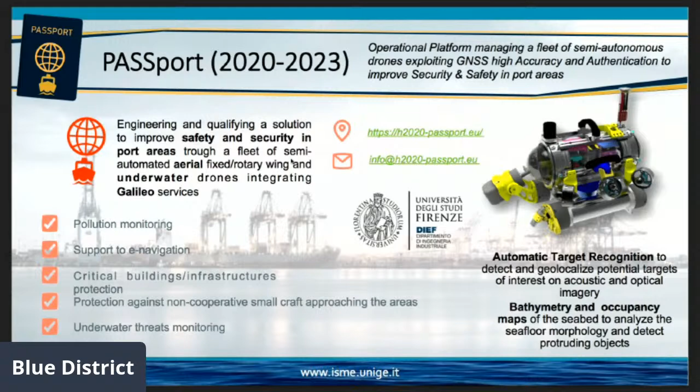These are now - I have a couple of slides on two very recent projects that are actually starting now by the node of ISME in Florence. One is this project called Passport, related to monitoring and improving security and safety in port areas using autonomous robots. The other one is called Pathfinder, which is financed actually by the European Space Agency. Space and underwater scenarios have very many similarities, and I find it interesting also to mention that funding itself may sometimes come from this direction.

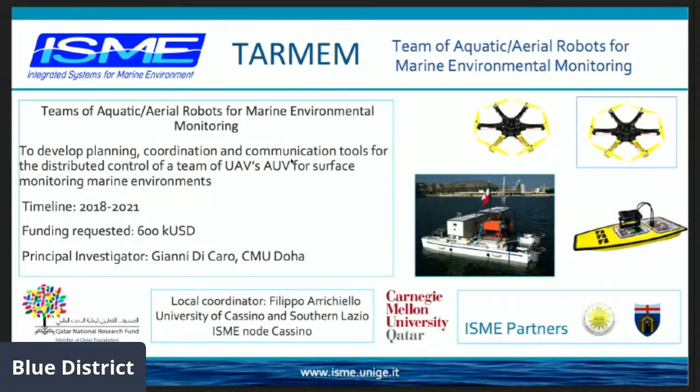This is another ongoing project, also related to flying robots. The idea is to design a system whereas some flying UAVs can autonomously land on a marine platform, which I think is also very interesting for future activities. I will skip these older projects and move on to something not mentioned yet today, but which I think is extremely important: what we call intervention robotics.

What is intervention robotics about? Well, except maybe for the example Alessio Turetta made of the vehicle needing close contact coupling with the terrain, all other acquisitions we saw performed by underwater vehicles are, let's say, remote. The vehicle senses either an acoustic signal or acquires images, so it has tasks that do not necessarily require physical interaction with the environment.

But intervention robotics refers precisely to the other situation, namely when a robot needs to have a physical interaction with the environment, either picking up something from the seafloor or turning a valve in some kind of infrastructure. This kind of work has been one of the topics of ISME historically. We have had several projects, many of them in partnership with Graal Tech, who also has a very long track record and experience in this area.

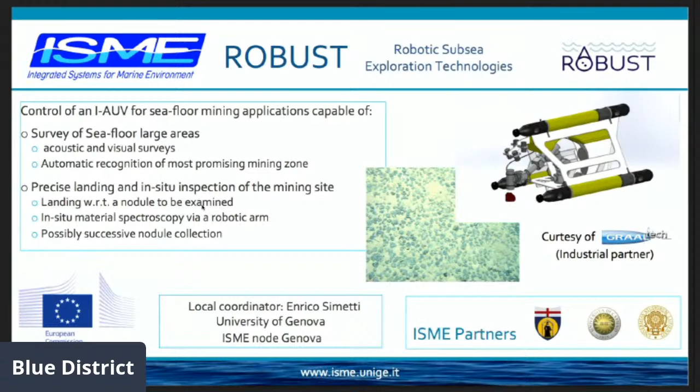I have a number of other projects related to this. I will simply skip these slides and point interested people to our YouTube channel or the ISME webpage, where these projects are listed. The ones I am quickly browsing now recently ended - in the last 3 to 5 years - and they all have to do with manipulation: Dexrov, Robust, and Maris, which is a little bit older.

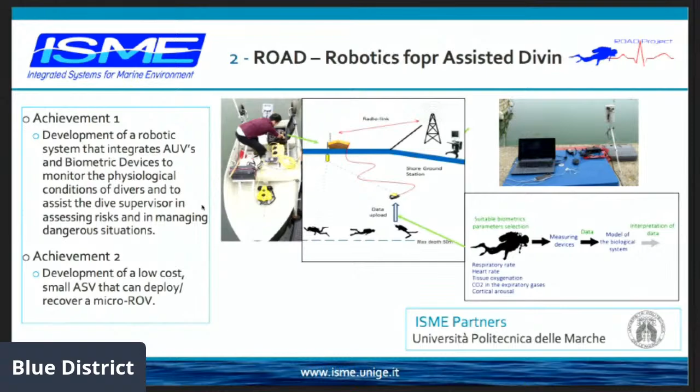Final note: diver assistance. This is, of course, the hot point and interest for H2O Robotics. We also, in ISME, have an interest in these kinds of technologies, and in particular, there is the node of Ancona, the University Politecnica delle Marche, where they have this kind of research going on. Again, there are a number of projects I'm not listing here, but I just wanted to mention that this is indeed one of the topics being followed by the Institute.

The last slide I would like to show, and then I close, is a very interesting one, at least in my view as a director. I just wanted to highlight that on top of the research we do in the center, we also do a lot of training, and sometimes this is a little bit overlooked, I think.